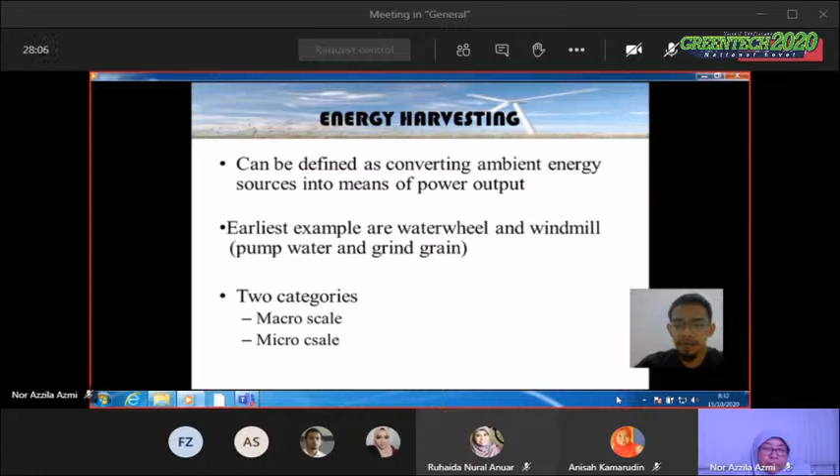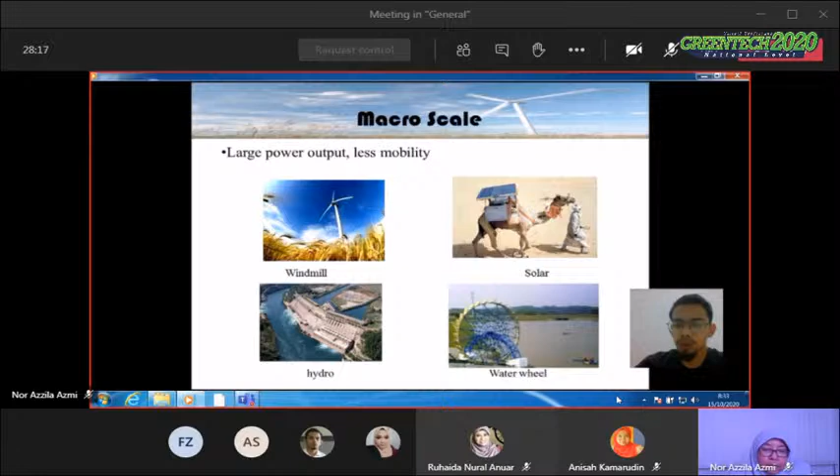This is an example of macro scale: windmill, hydro, water wheel, and solar. Next, micro scale: solar power suit is one of the examples. Solar can be categorized into macro and also micro depending on its size.

Then we have the thermo mask generator, where it converts the thermal difference of the device and uses it as useful energy. And then the kinetic power device, where it converts kinetic motion into electrical energy. And then vibrational source - here the example shown is the backpack with piezoelectric strap. So this project will be focusing on vibrational source.

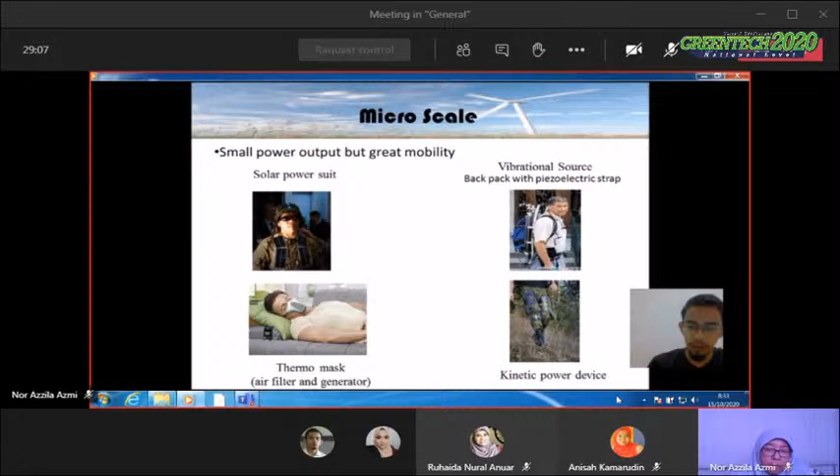Now let's look at the fundamental of single degree of freedom linear vibration modeling. Let's say we have a mass here, and then we have K here. K represents springs and C as dampers, and then our input base. So the input is represented by Y, and the mass displacement is represented by X.

Now we set the difference or displacement of the system as Z, where Z is X minus Y, and then we have our equation of motion here. We have the mass component, the damper component, and also the spring component here. When we expand the equation further, we will have these equations.

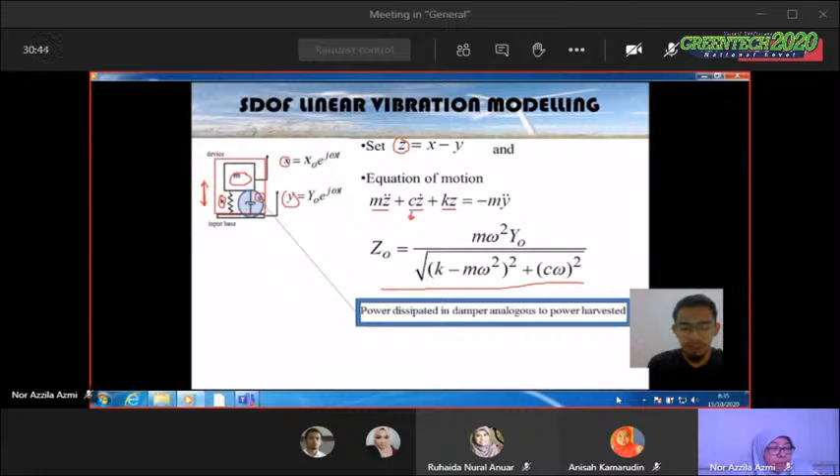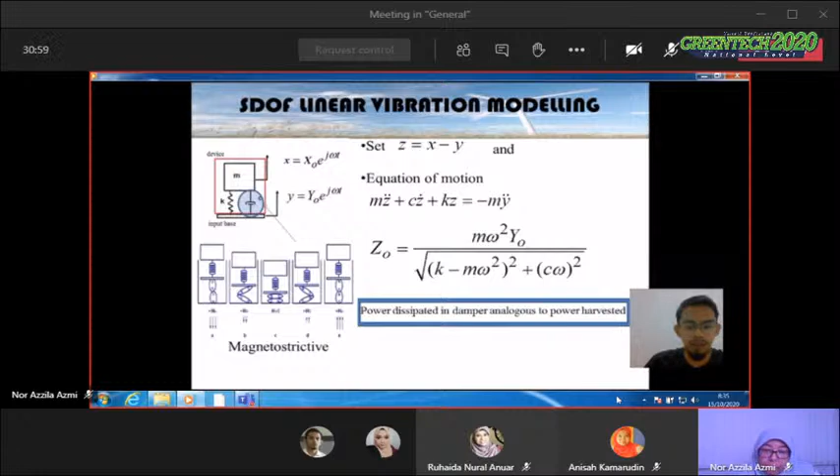Let's say we want to convert our vibration motion of the mass into useful energy. So we need to have a transducer. Normally, the damper C here is defined by a transducer. A transducer is a medium to convert the motion into electrical energy. Examples of transducer are electromagnetic, piezoelectric, electrostatic, and also magnetostrictive. When we equate the equation of motion into power terms, we will get this equation.

From this equation, we can see that omega here is divided by omega n, meaning this is the input frequency divided by the natural frequency of the energy harvesting device. We can say that the power is at an optimum when the input frequency is equal to the natural frequency of the device. So this equation can be simplified into this form.

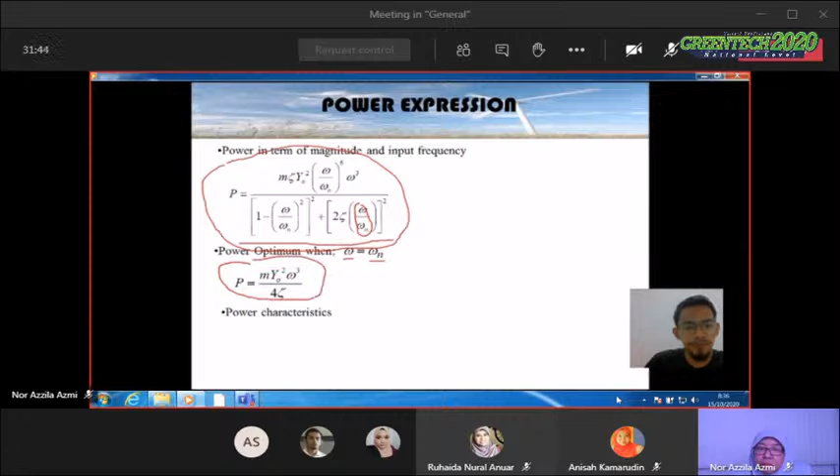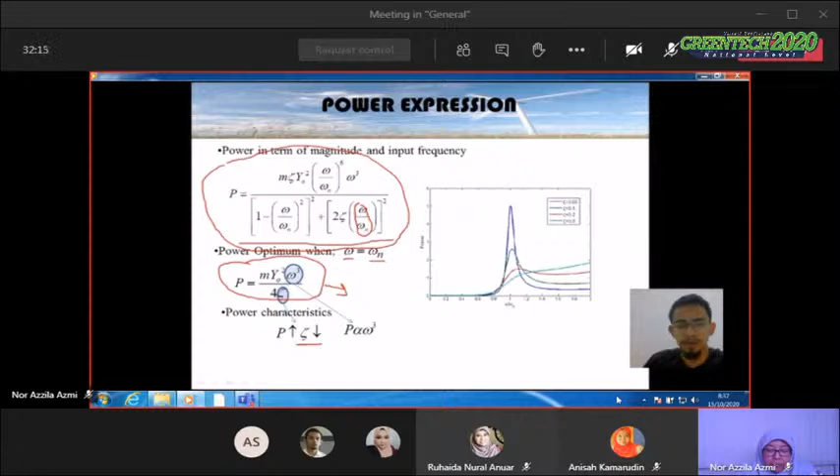Now, what this equation tells us is that power is proportionate to the cube of the excitation frequency. It also tells us that power increases when the damping ratio is low. When we plot this equation, we get this graph. Notice that the blue line is plotted with the lowest value of damping ratio, whereas the light blue line is plotted with the highest value of damping ratio. As we increase the damping ratio, the bandwidth here increases, from this line to this line.

But it also sacrifices the maximum power. In order to achieve this maximum power, we need to set our damping ratio as low as possible. But in doing so, we will decrease the effective bandwidth of the power to be harvested. So this is the problem statement here.

In order to design an energy harvesting device from this vibrational source, we need to have the natural frequency of the device to be similar to the frequency input we are giving to the device.

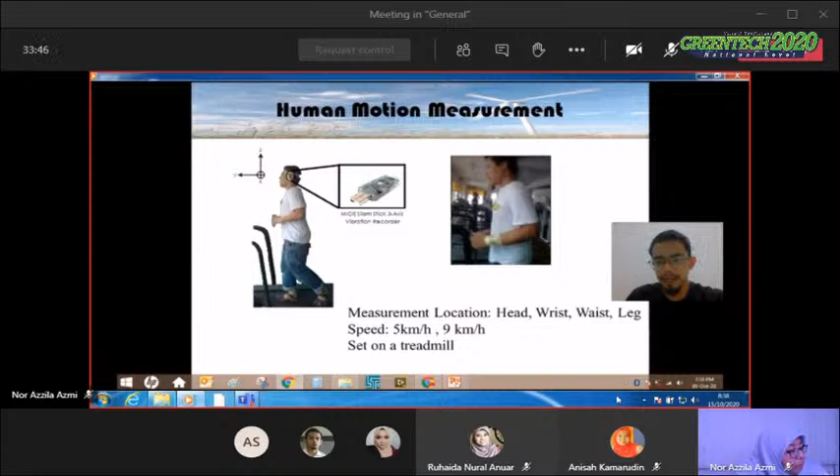So next, we go into the human motion measurement. We strap on a vibration recorder or accelerometer that is the size of a micro USB. The location is near the head, waist and leg, and the speed is set to 5 km per hour and also 9 km per hour. This speed is selected to mimic the behavior of humans during walking and jogging.

These are examples of the measured signals. We have 9 km per hour z-axis orientation, location at head; z-axis 5 km per hour at waist; and y-axis 9 km per hour at the wrist.

From all these examples, it depicts that the recorded signal is in steady state periodic motion, where a similar cycle is repeated throughout the recording time. It also shows that at different locations and different speeds, the result will be different. At 9 km per hour recording, the amplitude is higher compared to 5 km per hour at the waist location.

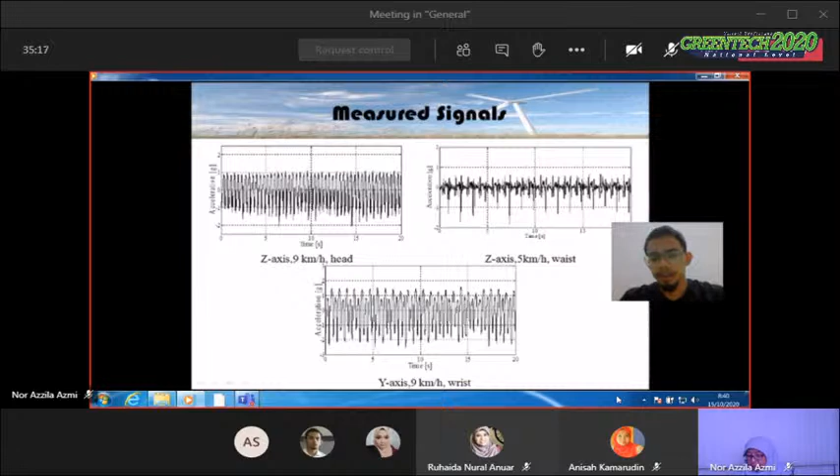Now that we have our measured signals, going back to our problem statement, we need to identify the natural frequency or design our energy harvesting device with natural frequency equal to the input, that is the human motion. We need to analyze these measured signals from time-based acceleration into a frequency-based graph.

This can be done by utilizing Fourier series. So let's say we have our measured signals here, and by Fourier series terms, this signal is a composition of a cosine wave and also a sine wave.

These two compositions can be separated or identified by using this equation, an and bn, and the magnitude of this signal composition is given by cn.

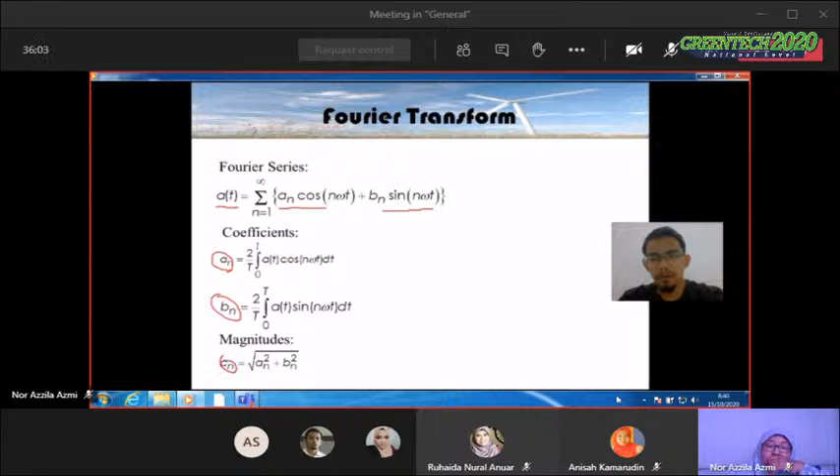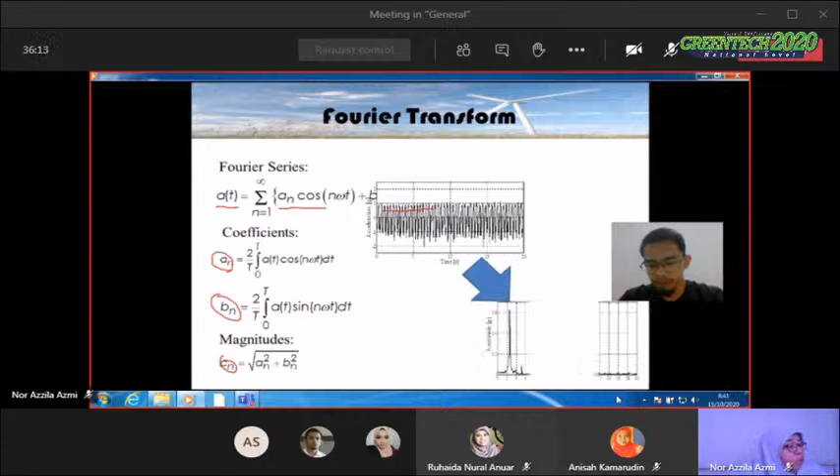Using Fourier series, we can now transform our time-based acceleration graph into a frequency amplitude-based graph. This is the example of z-axis, 9 km/h, location at head. On the left, we have the acceleration based on time, then processed into a frequency amplitude graph.

This graph tells us that the peak response or peak amplitude lies within this region. But it also tells us that the desirable bandwidth based on this input lies between this bandwidth area, meaning from approximately 1 Hz until 20 Hz.

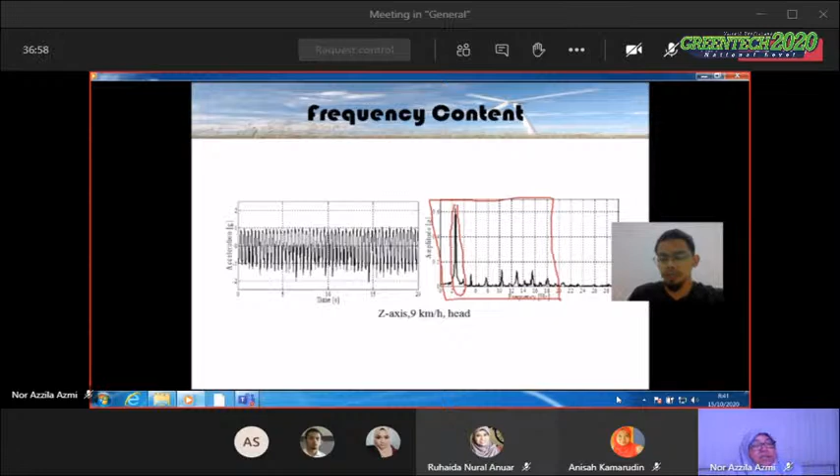Location and bandwidth differ here too, meaning it is important for our energy harvesting device to be aligned at the correct axis to harvest maximum energy as possible.

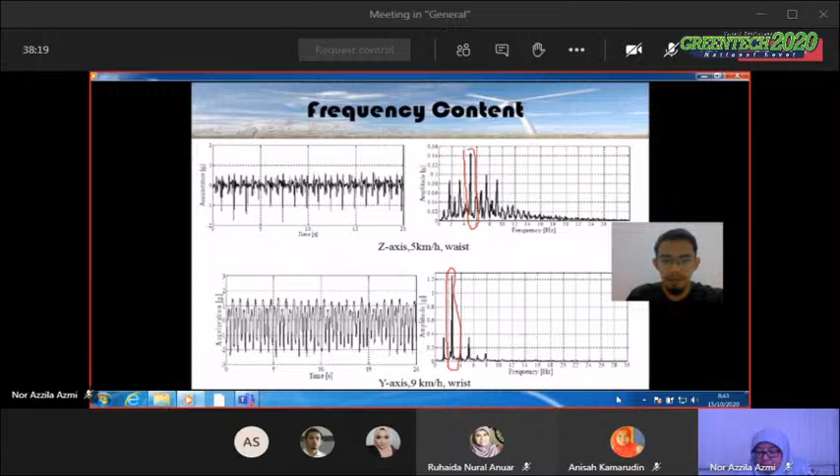It also tells us that different locations give different maximum response at different frequencies. These are shown by these two graphs, where for this case the maximum response lies within this region, but for this example the maximum response lies within this frequency region, and the effective bandwidth for this example is much wider compared to the one below.

Meaning, if we want our energy harvesting device to be as effective as possible, the natural frequency of the energy harvesting device should be set around 0.84 Hz until 5.085 Hz.

As a conclusion, we note that the input frequency and natural frequency of the system and the input of human motion need to be equal for optimum response. And the axis orientation of the energy harvesting device is also important in order to harvest maximum energy as possible.

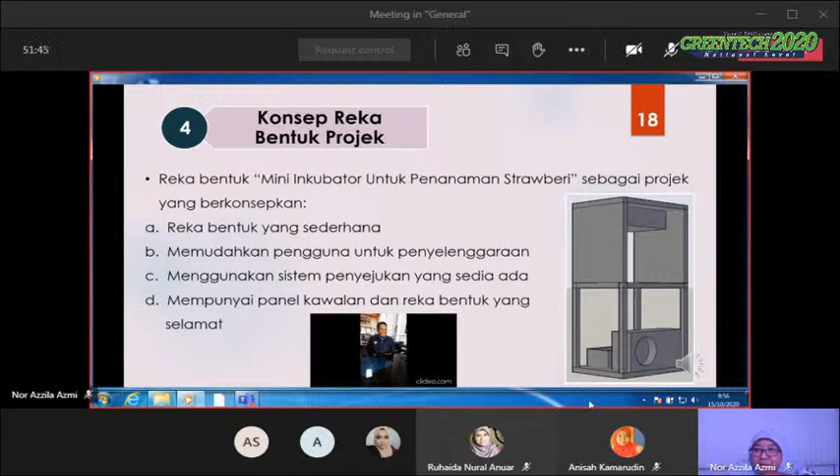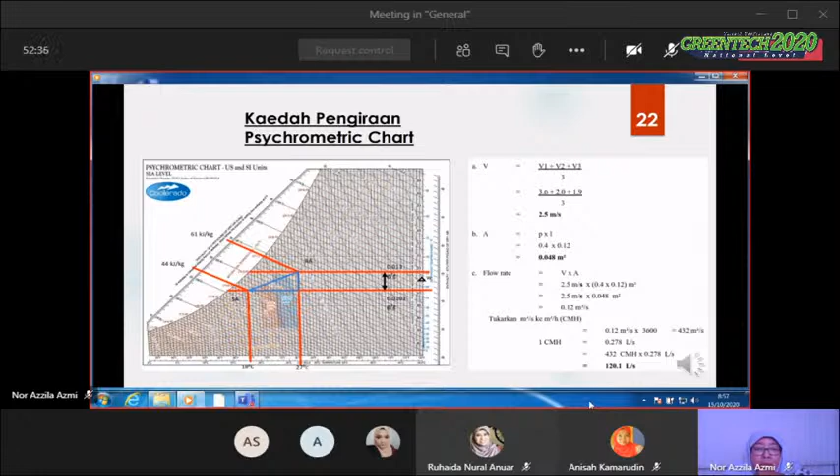Analisa data dengan menggunakan nilai data dari uji kaji dijalankan untuk mengetahui total heat digunakan. Dua kaedah boleh dibincangkan, iaitu kaedah pengiraan psychrometric chart dan kaedah simulasi. Ini salah satu contoh pengiraan psychrometric chart, haba deria, haba pendam, sistem kapasiti.

Ini gambar inkubator, indoor blower, inkubator, sling meter, kerangka, kompresor. Terdapat dua bahagian, satu atas dan bawah.

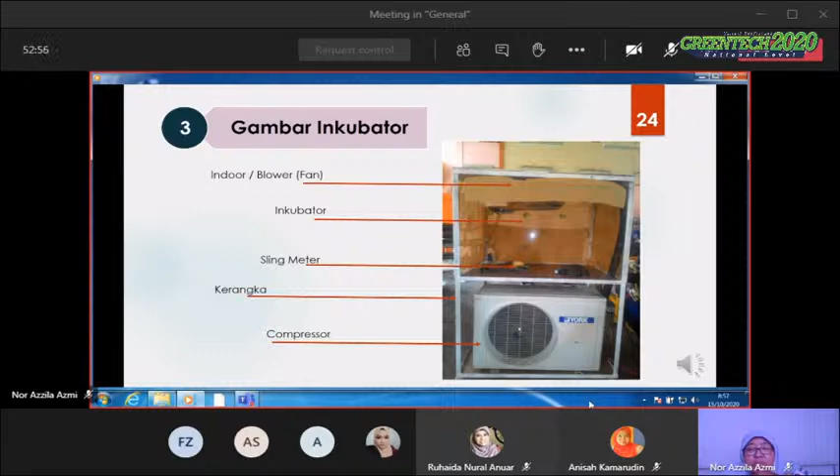Kesimpulan. Bagi mencapai objektif produk ini adalah dengan mendapatkan suhu yang seperti mana di Cameron Highland. Selain itu, dari segi penjagaan pokok pula tidak terlalu sukar kerana penjagaannya mudah. Dengan adanya produk ini, ia mampu mengekalkan suhu yang sama seperti di Cameron Highland, iaitu 15 darjah C hingga 23 darjah C. Suhu ini merupakan suhu yang sesuai bagi tumbuhan yang beriklim sejuk seperti pokok strawberry dan sebagainya.

Sekian, terima kasih.

Okay, this is the research objective of this paper. So the objective of this research were to present the development of the Sustainable Energy Lake Recreation Center, or SELREC, using the off-grid solar PV system at Polytechnic Sultan Azlan Shah, to calculate the energy cost savings and carbon emission reduction caused by using a solar PV system as a power supply for lighting at SELREC.

Our research is based on past studies from several papers. Some of them, from Po-Chien Hsu, conducted research on solar photovoltaic system for self-consumption at National Taiwan University, where the system is not connected to the grid.

So the PV solar panel from PSAS also is not connected to the grid system. For the research of Elieser Tarigan, conducted the analysis of the rooftop PV at University of Surabaya, Indonesia. Through the installation of the rooftop solar PV at their building, the author also calculated the greenhouse gas emission CO2 reductions. Othman and friends calculated the potential energy solar production with consideration in Malaysia, based on average of 4.5 to 8 hours of bountiful sunshine every day.

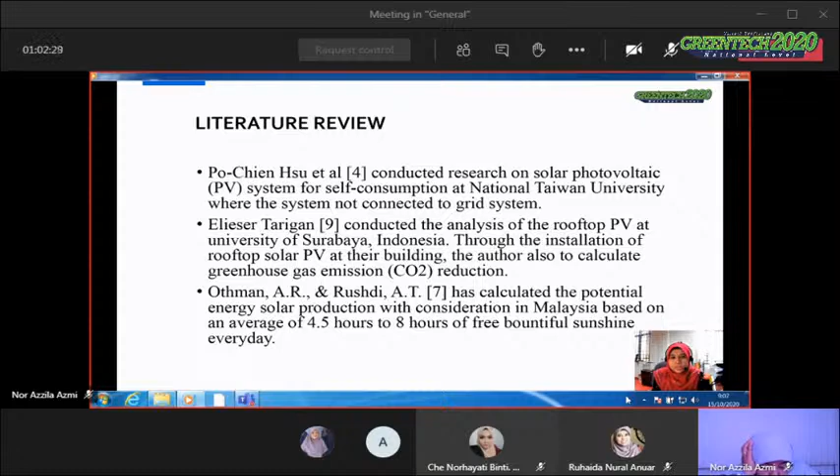In this paper, we assume that the calculation for solar energy production is around 4 hours. This is our single line diagram for the off-grid solar PV system at SELREC.

We adapted this single line diagram from Sharon Nizam 2019. From this system, we can see that our solar panel is equipped with the battery, inverter, and the load. We have several loads to light up the lights from the solar panel energy.

SELREC PSAS deployment uses solar energy equipment, such as 3 monocrystalline photovoltaic panels, a 12 over 24 volt charger controller, and a power inverter, 3000 watt power inverter, fully automatic DC to AC inverter.

We have a battery, 3 batteries, 110 ampere hour, 12 volt, sealed lead acid, to operate 20 units of 10 watt and 20 watt floodlights around the lake.

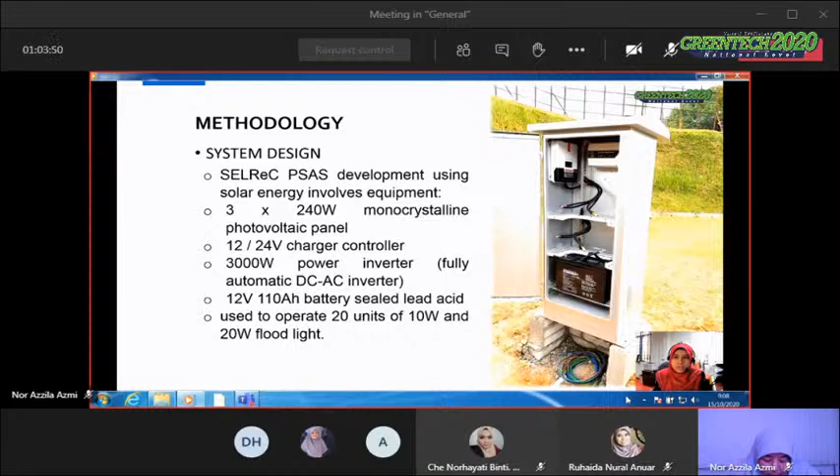SELREC PSAS development process starts from analyzing the light intensity using the appropriate apparatus. After that, we set up the feeder pillar, where we put the batteries, charger controller, and inverter in one space, right after the PV solar. After that, installation of the PV frame, and the PV solar is put on top of the frame.

Next, we do the underground cabling, laid from the feeder pillar to the floodlights around the lake. The last step is the floodlight load installation around the lake.

The final step is we do the testing process, to make sure all the loads function well.

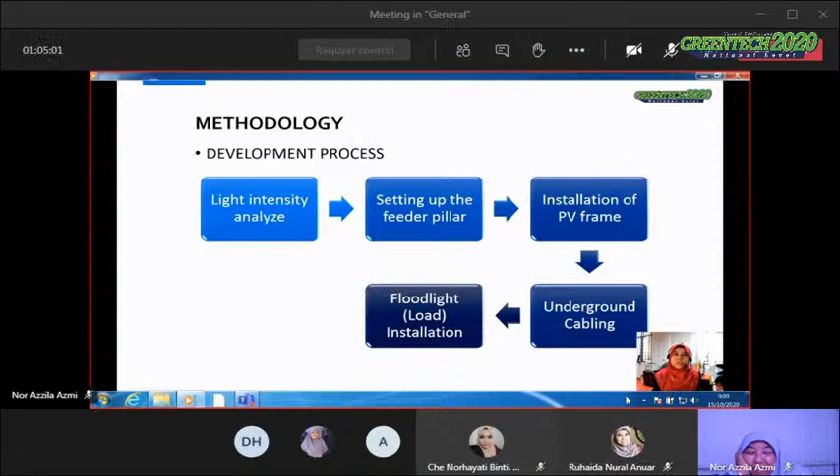This is the energy cost calculation. To calculate the energy cost, assuming the efficiency of the solar panel is around 85%, the energy generated by the solar PV system per month is calculated as: energy generated per month equals power generated times total hours times efficiency times 30 days, which is one month.

The power generated is around 0.72 kilowatt, 4 hours of bountiful sunshine, times the efficiency around 0.85, times 30 days, and the result is 73.440 kilowatt hour per month.

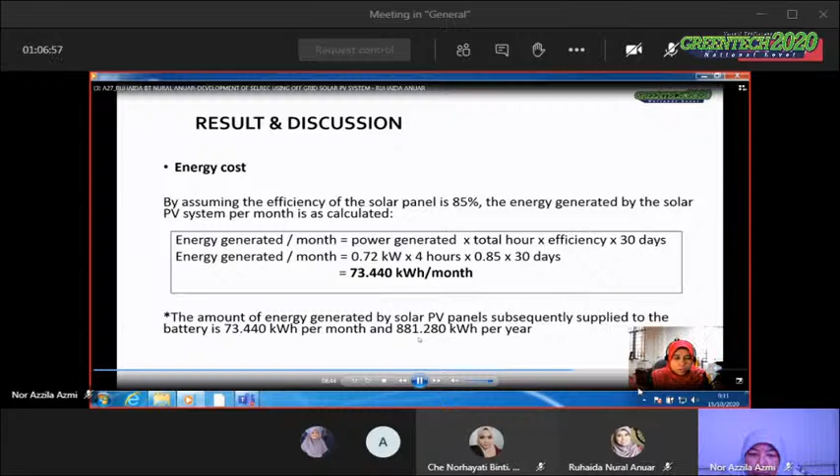The amount of energy generated by solar PV panels subsequently supplied to the battery is around 73.440 kilowatt hour per month, and for a year the energy cost is around 881.28 kilowatt hour per year.

To calculate the energy cost, referring to the TNB tariff block, PSAS is under the commercial C1 group of tariff block. The energy consumption calculated is around 881.280 kilowatt hour, with the rate of 0.365, so the energy cost saving is around 321.67 per year. This is the energy cost saving that we calculated based on energy consumption produced by the PV solar.

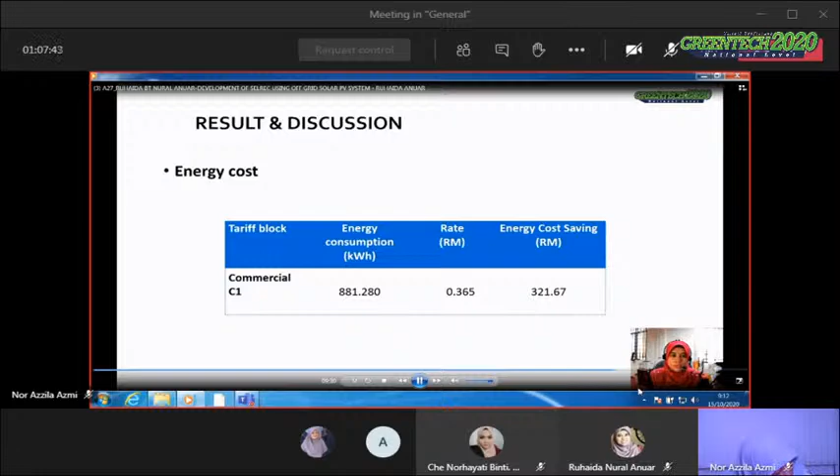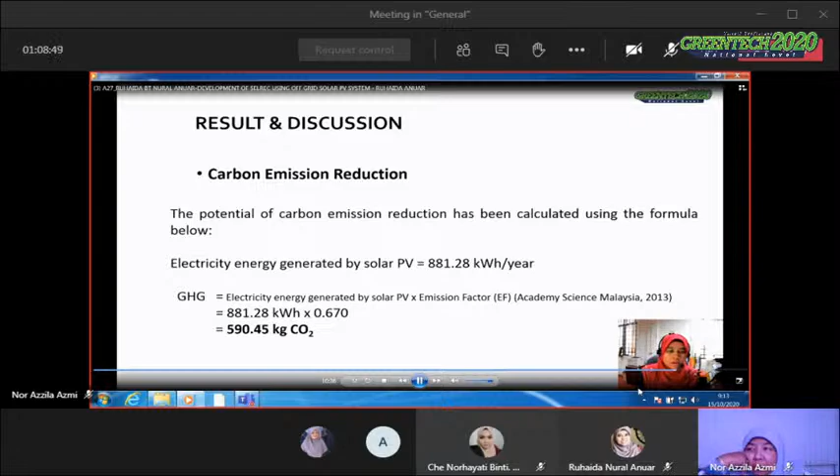As the conclusion, SELREC was developed using solar energy and becomes a platform to support sustainable development and conserve the environment. It also supports education, awareness, and promotes the widespread application of the National Green Technology Policy.

Based on this research, the development of the SELREC using an off-grid solar PV system will allow PSAS to achieve energy cost savings of around 321.67 per year, while the value of carbon emissions preventable from the SELREC development area is around 590.45 kilogram of CO2. Lastly, these are our references for this paper, the development of a sustainable energy lake recreation center using an off-grid solar photovoltaic system.